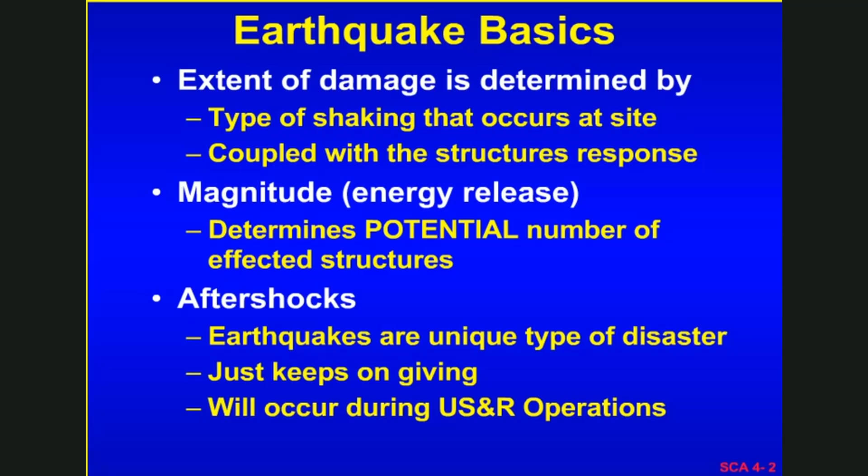How many aftershocks? Not easily predicted. There are rules of thumb, one from the USGS that said that for every single decrease in magnitude, there's going to be about a 10-fold increase in the number of aftershocks. And you can see an example for a magnitude 7. What you find is that as the days pass from the initial quake, you end up having fewer and fewer aftershocks, and typically the magnitude also goes down.

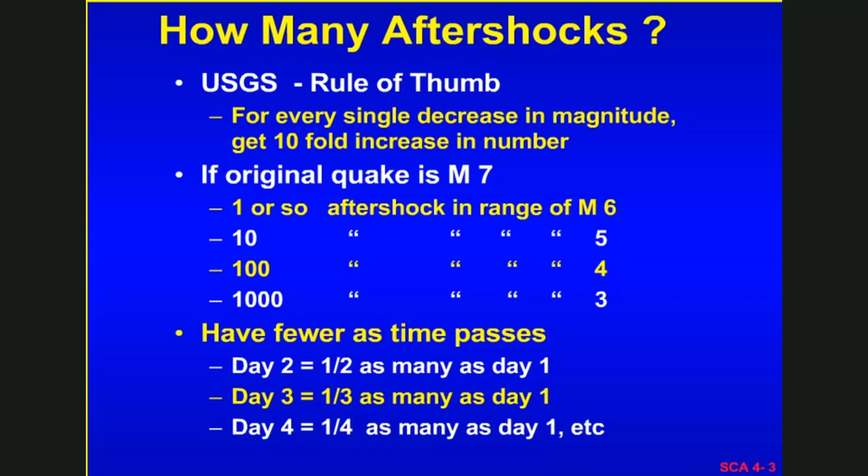This is just an example from the 1989 Loma Prieta earthquake and the amount of aftershocks that occurred. The original quake was about a 7.1, and you could notice that almost right after that there was a 5.2, 5.3, rather significant. Quite a bit smaller, but then again acting on damaged structures. And note, we're not going to be there for the initial quake. We're here afterwards, and subject to these aftershocks.

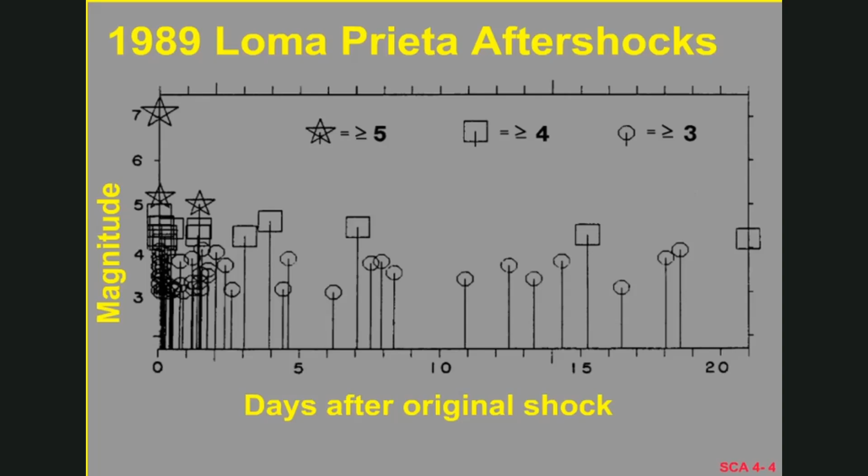Now, why do we get loading on the buildings from earthquakes? The loading is actually an effect of the ground motion resulting from the earthquake, mainly due to the weight or the mass of the structure. It turns out that the heavier the structure, the higher the forces will get on the structure during the earthquake.

A good analogy would be if you're sitting as a passenger in a car and the driver punches the accelerator, you can feel the force as you get forced back into the seat. If the driver then suddenly slams on the brake, you're going to feel that force as you move forward against the seatbelt, or if you're not wearing the seatbelt, you'll feel the dashboard hitting you. Again, it's that inertia of the mass.

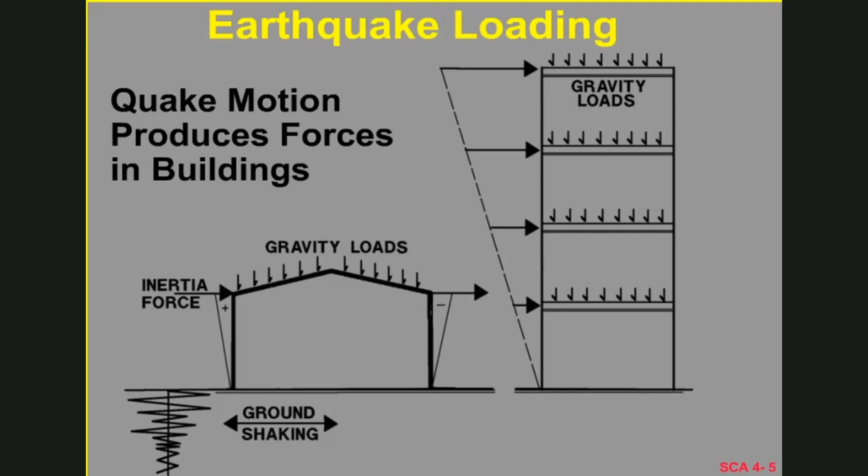Now, because the force is related to mass, to weight, we find that it's the heavier buildings that sustain the higher forces during an earthquake and typically see the greater damage. Again, we talk about the URM, or the unreinforced masonry structures, being real weak. They sustain heavy damage. They have basically two things going against them. One is their mass, their weight, plus the fact that they're a very brittle structure.

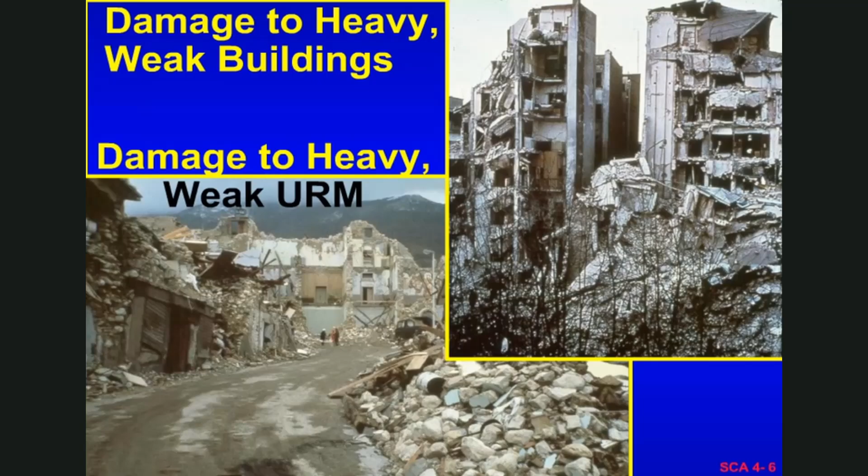We even get damage to underengineered or unengineered wood structures. Again, if they're not properly constructed for earthquake or seismic conditions, they will get damaged. Typically, we don't see collapse, but again, in the end, they become uninhabitable.

One thing to remember is that it may not only be the collapse or partial collapse of the structure itself that can entrap victims, but it can also be the contents of the structure. One example is shelving or storage racks. I always joke the one place you don't want to be during an earthquake in California is a home improvement store such as Home Depot. Especially don't be looking at riding mowers during an earthquake, because they tend to store some of those up at the top shelf of the rack.

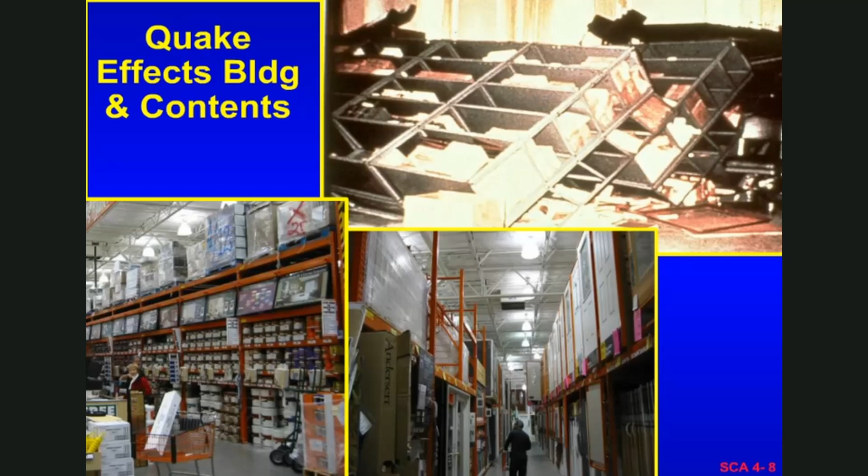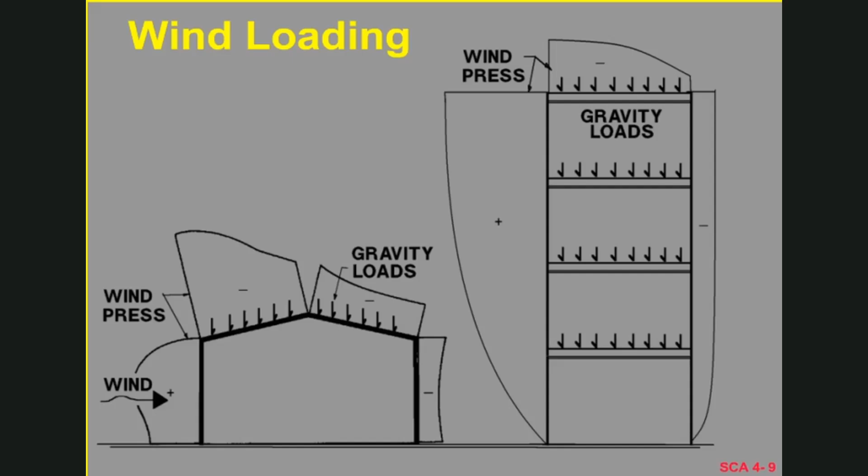We'll now look at wind loading. Again, wind loading comes from the movement of the air. The forces that get applied to the structure include a positive force or pressure on the windward side, but with wind, you have to realize that there's also negative pressure or a vacuum that can develop, and we see that on the leeward side, and more importantly, on the roofs. The roofs actually get subjected to an uplift force. And here, unlike earthquake loading, where the weight hurts us, with wind the weight helps us, because we find that it helps counteract these negative pressures or forces.

Now, where do we get the wind? Well, obviously one would be hurricanes. There we have winds from 73, 75 miles an hour up to 175 miles an hour. Now, you have to realize that the force that develops from wind is proportional to the speed squared, meaning that if you have a 100-mile-an-hour wind, that is going to be a force that is 4 times that you would get from a 50-mile-an-hour wind. So when you go from a Category 1 to a Category 5, you're getting a very large increase in the damage that is possible.

Now, again, we talked about the fact that weight with wind helps you. And what we find is that we get a lot of damage to the light structures, the wood frame houses, light metal buildings. Another problem with the wind is that you end up with airborne missiles that upon impact will cause damage to the structure. Sometimes they compromise the exterior shell of the structure. This then allows the wind to get inside the structure, which will quite often blow apart the building.

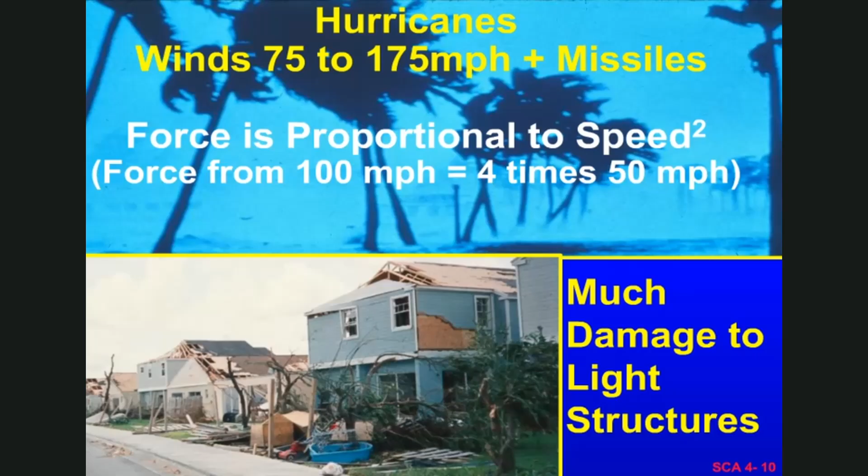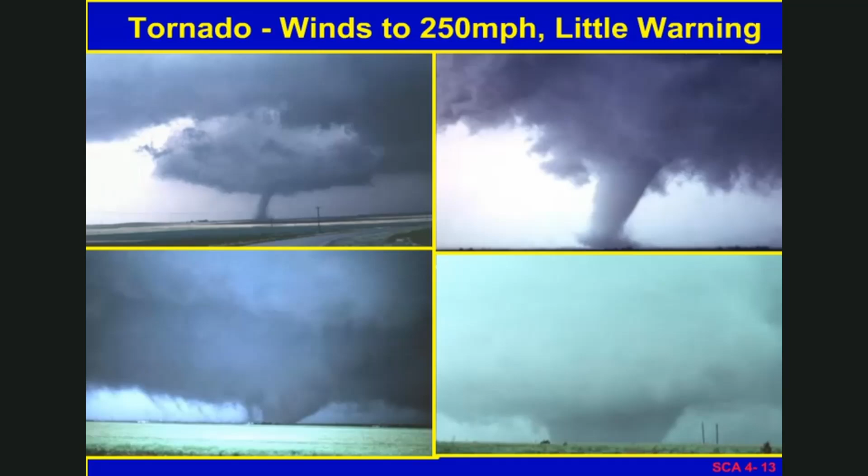Tornadoes, though typically more localized than hurricanes, have much higher wind speeds, up to and sometimes exceeding 250 miles per hour. So again, the forces are much greater. Another problem with tornadoes is that unlike hurricanes, there's very little advance warning. Consequently, you have potential for more casualties. One devastating tornado occurred in and around Oklahoma City in 1999. It was an F5, one of the highest categories for tornadoes, and also had a very wide path, up to a mile wide. Much devastation.

We want to turn our attention towards blast effects. With blasts, what you end up with is a very rapid release of energy. You get that bang, but you also get heat and light, or a fireball. The pressure wave, even though it is very short duration, is an increase in pressure, and that pressure is very high. Whereas for wind we only see pressures of less than 1 pound per square inch, with a blast you can get up to about 5,000 pounds per square inch. The shock waves are actually pressure waves, and they'll propagate radially out in all directions from the source of the blast. And it's this pressure wave that causes most of the damage to structures.

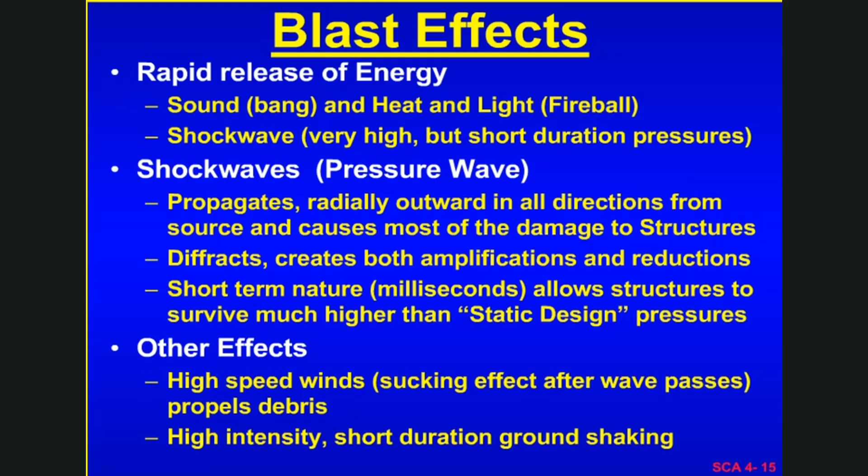What can be particularly devastating to a building is an interior explosion. There, you contain that pressure wave, it builds up, and will affect all immediate components of the structure. Typically, in buildings, we can tolerate the loss of a floor system. It's much harder to tolerate the loss of the column. Again, the column is what's actually carrying a greater portion of the load down to the foundation.

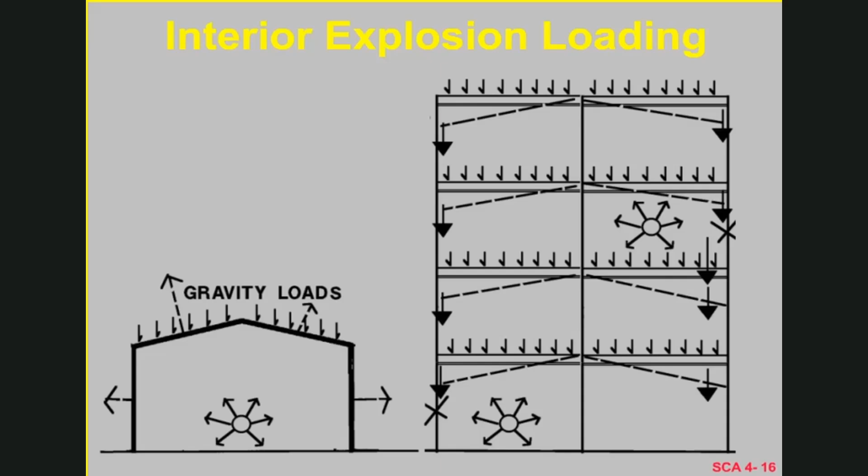Just a schematic of an exterior explosion. Again, all things being equal, the pressure dissipates a lot faster in an exterior explosion. Again, here distance is everything. In addition to the positive pressure at the face of the building, you do get pressures on the top, an overpressure, plus pressures on the backside as well as the sides from the drag of the pressure wave going across or over the building.

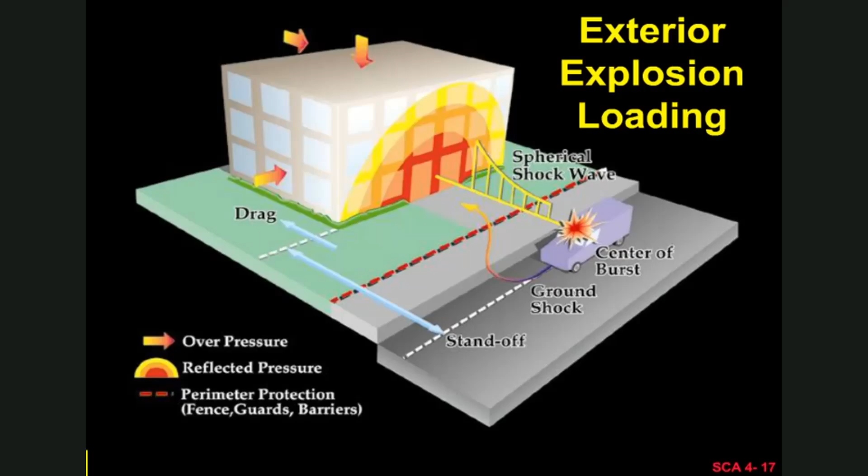Fire. We certainly talk more about this since 9/11. Fire and the heat resulting from fire affects the structure, affects the material, particularly steel. What effects do we get? One is expansion. Steel and concrete will expand about 10 inches in 100 feet when the temperature goes from ambient up to about 1100 degrees Fahrenheit. Just to put that in proportion, the World Trade Center side dimension was about 200 feet. So, bringing the steel up to 1100 degrees would have caused up to a 20-inch expansion.

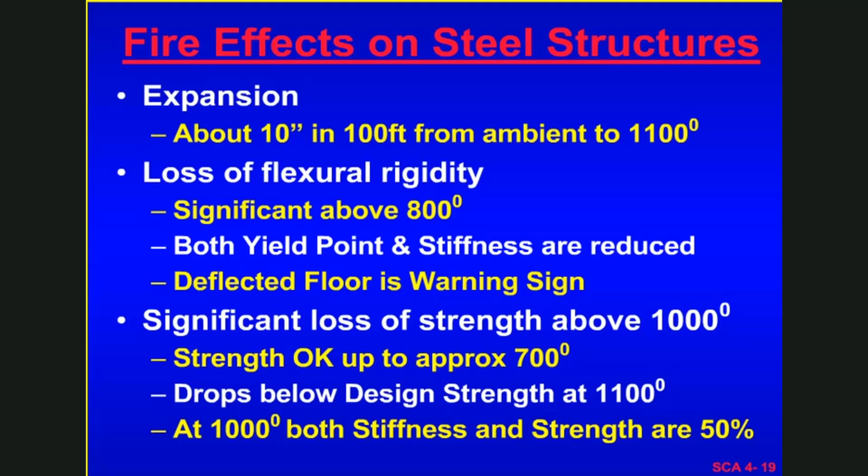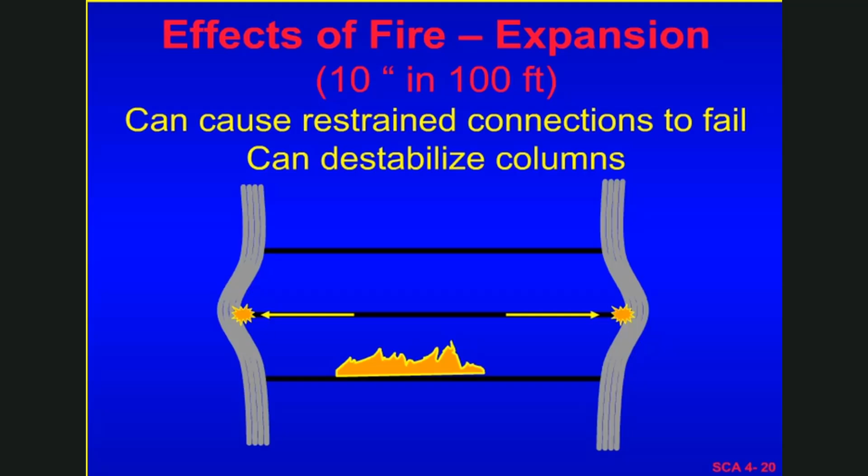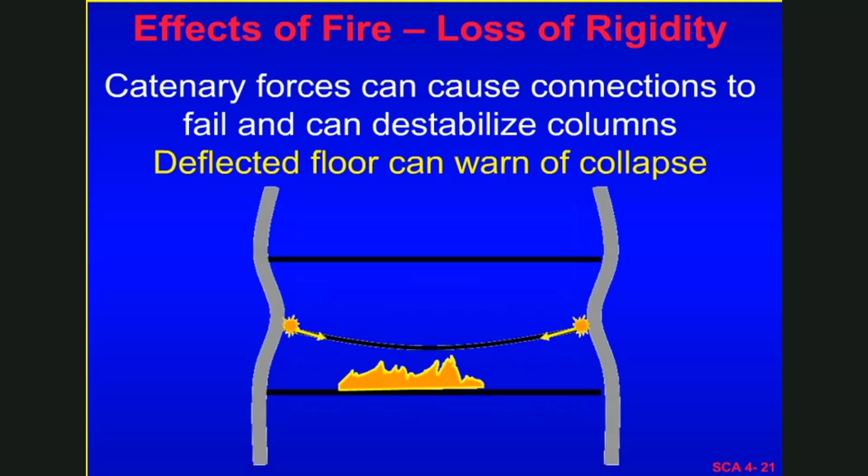Schematically, this just shows the effect that an expansion might have on a structure. The floor system, which traps the heat underneath, will expand and deflect the columns out. This obviously would weaken the columns and make them more susceptible to buckling. As the temperature increases further, we lose the rigidity in the steel in the member. They sag, and now the floor system is pulling in the columns, again helping to destabilize them. If you see a floor system like this and you're inside, you need to get out because it is a warning sign of impending collapse.

At some point, you're going to lose the strength in the floor system. It collapses. The problem here is we now have columns that were supported at every floor. Now they're unsupported over a greater length and, again, more susceptible to buckling. And basically, this is one of the contributions to the collapse of the World Trade Center towers.

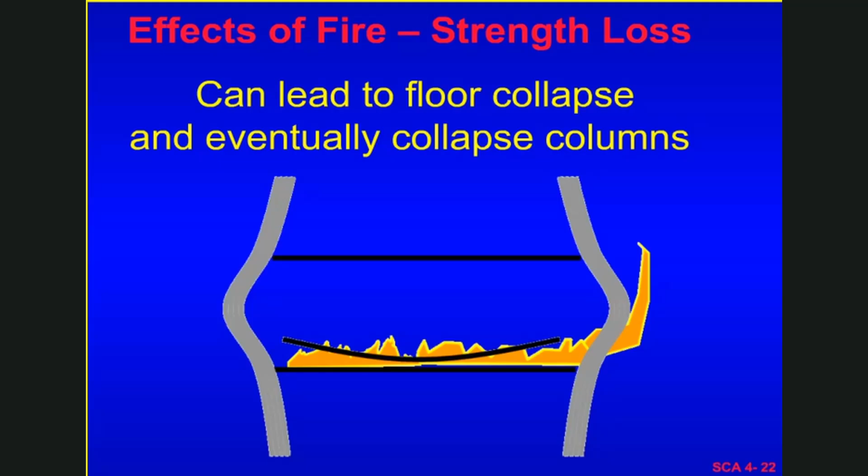Again, what are the effects of fire? Strength loss. The greatest effect is on horizontal members, the joists and beams, because the heat gets trapped under the ceilings. Plus, the smaller members with high surface area to cross-sectional area collapse first, because they heat up quicker and lose their strength. The larger, thicker members take longer to get up to critical temperatures. So you see less effect on columns, because the heat is trapped only at the upper portions of the columns. The columns are typically thicker members, and they can dissipate the heat to column sections both above and below the affected floors.

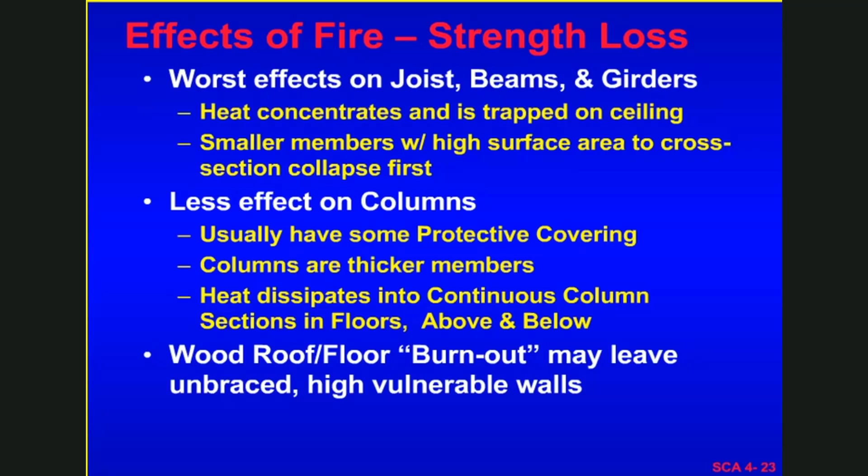Now, in wood structures, the thing to worry about is that the wood members can burn out, and this can leave exterior bearing walls unsupported and susceptible to collapse or buckling. An example of this was the Worcester fire in Massachusetts in 1999, where the wood interior burned out, and this left the exterior unreinforced masonry walls unbraced. During the recovery operation for the 6 firemen trapped in there, the structure specialists had to continuously monitor these walls because they were susceptible to collapse from, say, high winds.

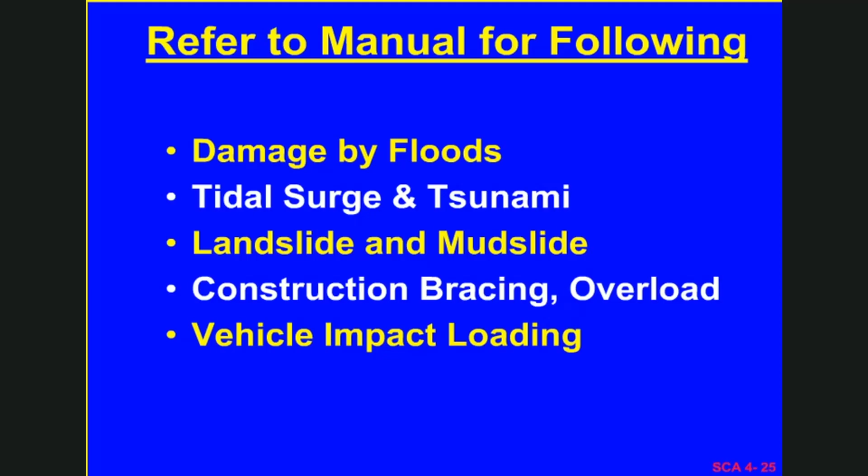The manual that you have access to talks about additional effects from floods, tidal surges, tsunamis, landslides, mudslides. Also, the problem of the lack of bracing during construction, where you get collapse. Also overloads and vehicle impact loading. So at your leisure, you ought to look through that. These are just more effects that can cause overloads on our structures or buildings.